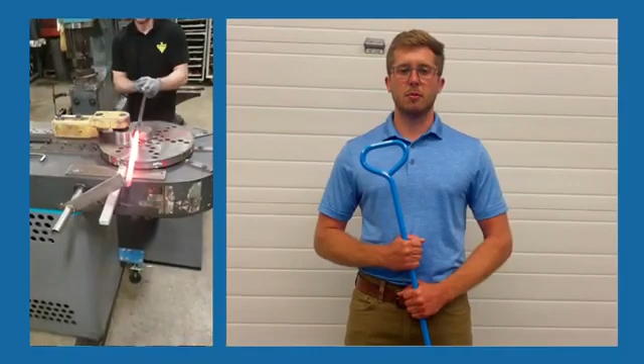Currently, the process consists of heating the steel in a forge until red hot, which requires additional time to make each product, along with producing excess heat, noise, and fumes. This process is performed on 2 different bending machines, with the product being readjusted manually by the operator between each bend. Once the metal is properly heated, the first 55-degree bend is made on a rotary bending machine, which you can see here. The rod is then moved to a secondary bending machine to perform the final 2 bends.

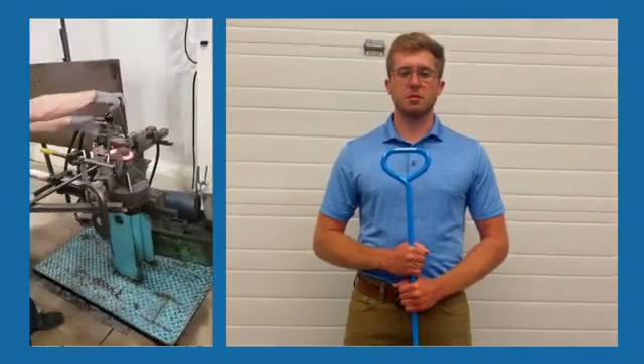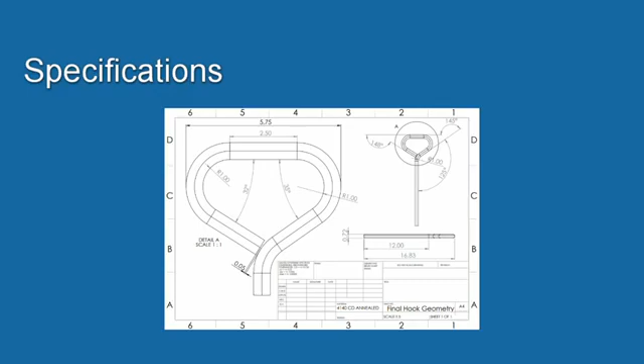After bending the hook, the handle is checked and adjusted using manual correction gauges to ensure the critical dimensions have been achieved. The goal of this project was to design a machine that is capable of bending multiple 1-inch radius bends in a 5/8-inch hexagonal 4140 steel rod to form a hook handle. There were a total of 18 specifications that were listed. However, there were 6 critical specs that determined the course of the entire project.

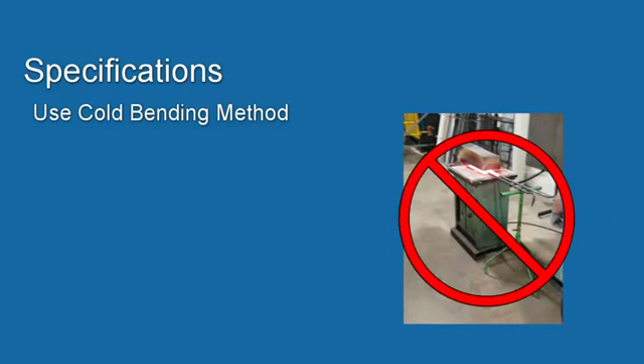First, every bending method in the process must utilize cold bending to eliminate the use of the furnace. Bending cold will cause springback to occur. Therefore, overbending the rod is needed to account for the degree of springback. Second, the process must be completed on 1 machine. This will ideally save the sponsor room on his shop floor and make for a quicker and more reliable bending process.

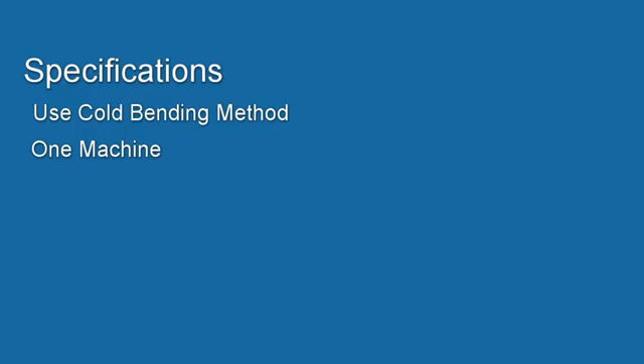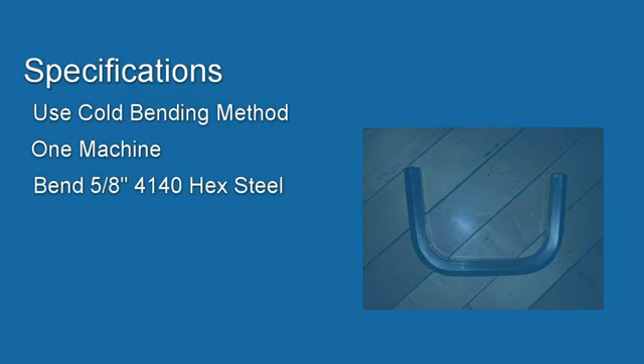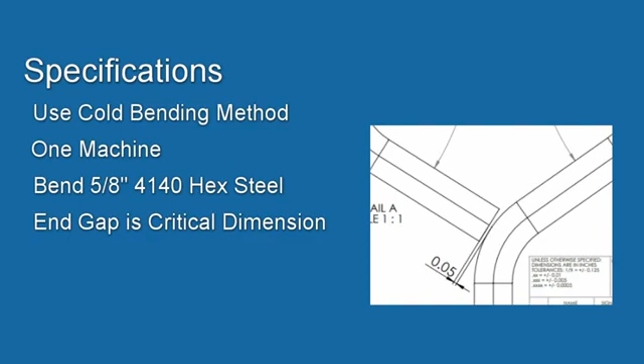Third, as was mentioned earlier, the stock that needs to be bent is 5/8-inch hexagonal 4140 steel. Fourth, the gap at the end of the handle, seen in the attached figure on the bottom right, needs to be minimized to smaller than 0.05 inches. Fifth, the amount of user interaction needed to be reduced. This would result in a more automated process that would require the operator to only load the part and remove it from the machine once the part was completed.

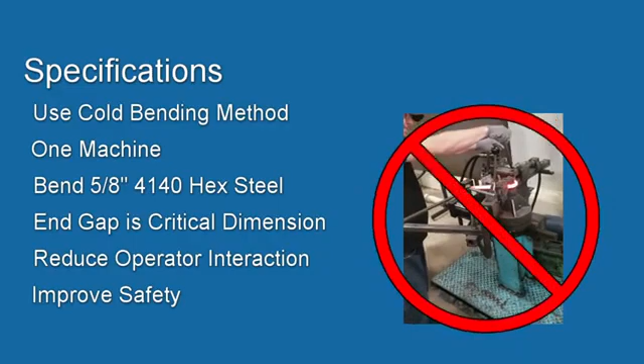And lastly, the safety needed to be improved. So for example, on the current process, the rod swings toward the operator on the final bend, which needs to be eliminated.

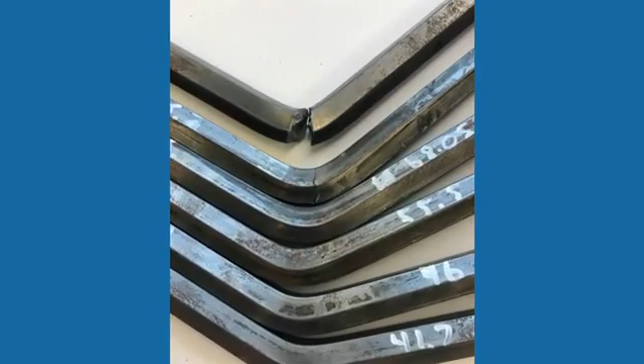During the design of this machine, several challenges arose. The first was the use of cold forming. When metal such as steel is bent cold, there is a chance of rupture due to a high concentration of stress. A method had to be found that would not cause this rupturing. It was found that applying the force at a point caused a high concentration that would lead to fracture. Therefore, the force had to be distributed over an area.

The second challenge was decreasing operator interaction. Optimally, the machine would have little to no user interaction. The part would be loaded, a button would be pressed, and the bends would be completed by the machine. This led to challenges of finding the correct bending order and also bending the part to the required specifications.

The next challenge was adjusting for springback. When cold metal is bent, it tends to spring back closer to its original shape. To accommodate for this, the part has to be overbent. The dies had to be adjustable to accommodate for overbending.

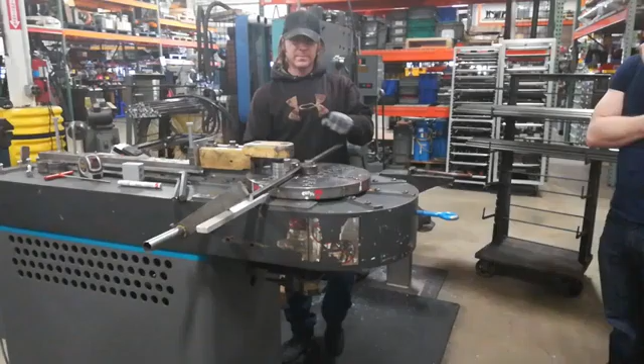To account for the springback involved, an analysis was performed using machines currently available at T&T Tools. In order to collect springback data, raw, cold steel hex stock was bent on each of the machines to determine springback at multiple angles. It was found that samples ruptured at a bend angle of 70 degrees using the Di-Acro rotary power bender. T&T's custom-built bending machine, however, was capable of bending raw material to a higher angle without

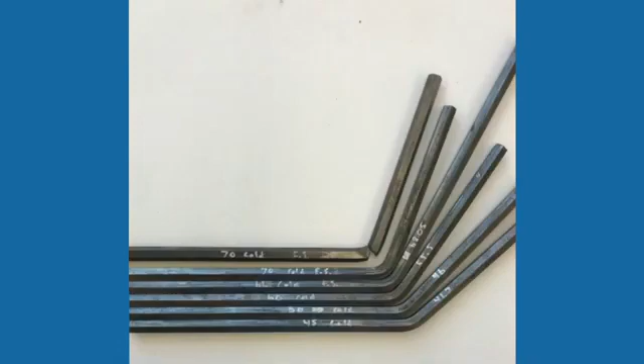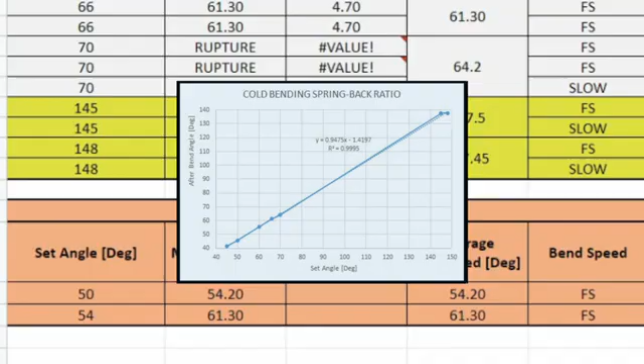rupture. For larger angles, the measured springback was higher than that of lower angles. For a final bend angle of 145 degrees, an overbend angle of nearly 155 degrees was required. For a final bend angle of 55 degrees, an overbend of nearly 60 degrees was required.

3 different design concepts were developed to improve the bending process. The first design concept would bend the hook handle around forming dies using 3 cylinders. The pros of this design are that it requires minimal operator input, improves cycle time, is easy to repair, and is safer because the hook end does not move. Conversely, the required stroke length of the cylinders was very long, and properly positioning each of the cylinders would pose a significant challenge.

The second concept design also requires 3 cylinders. The first bends are made by moving the entire carriage down onto the forming die. The second and third bends are made by actuating the side cylinders one at a time to form the hook handle into its final shape. The pros of this design are that the process is mostly automated, it requires minimal operator input, it is easily assembled, easily maintained. Cons of this design are that the custom dies are expensive to machine, and it also poses a more difficult challenge to program the PLC.

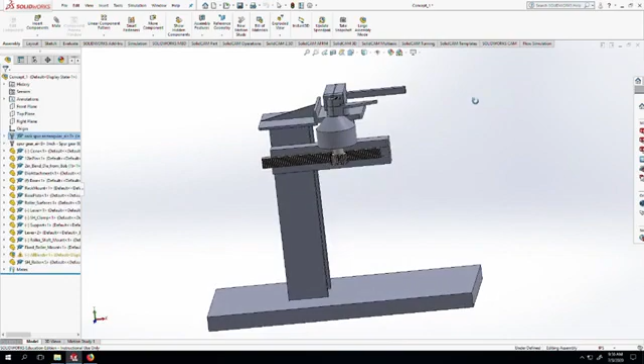The third concept design performs each bend by pulling it around a bending die with a rack and pinion assembly. This concept only bends around one point and is easily adjustable for springback, but requires the operator to reorient the part after each bend. The second concept design was selected for further development.

During the concept selection phase of this project, a national emergency arose as the spread of COVID-19 was declared a pandemic by the World Health Organization. This provided many challenges for the team, as it did all around the world. With the closing of GVSU, the team was required to complete the design virtually while practicing social distancing.

The main concern at this time was the concept selection, since the concept that had presented itself as the best in meeting the specifications used an untested method for bending. With the support of T&T Tools, the team was able to get the required testing performed, and a concept could be chosen. From there, the team went through complete design of the concept without meeting in person.

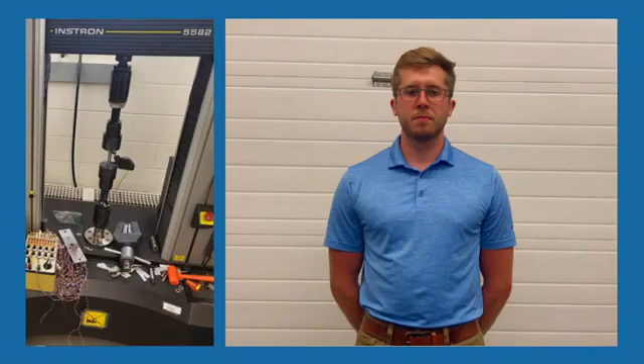The prototype was first modeled on SOLIDWORKS with key dimensions that would be used within the actual design. The ANSYS simulation used the imported SOLIDWORKS geometry and was set up to solve large deformations with multilinear isotropic hardening properties. The supplier of the rod material conducted a tensile test for the 4140 hexagonal steel rod. The nonlinear region of the stress-strain results was entered into the simulation to account for the nonlinear yielding properties.

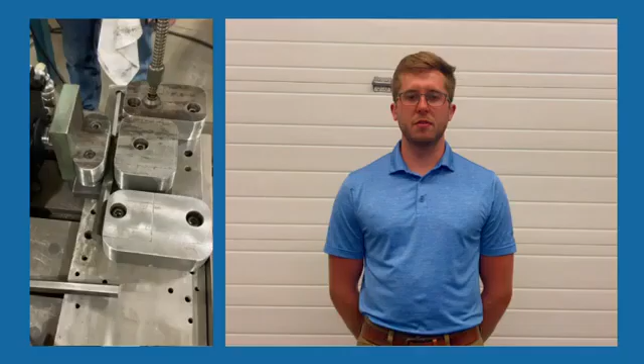The SOLIDWORKS model was sent to T&T Tools to be manufactured and eventually tested. 3 trial runs were conducted to ensure that the prototype would function the same each time. The prototyping concluded that rupturing would not occur in the material.

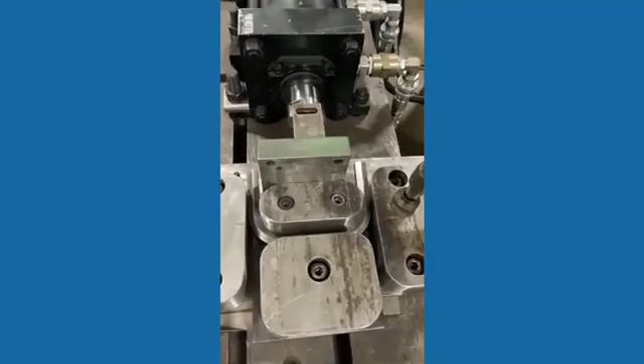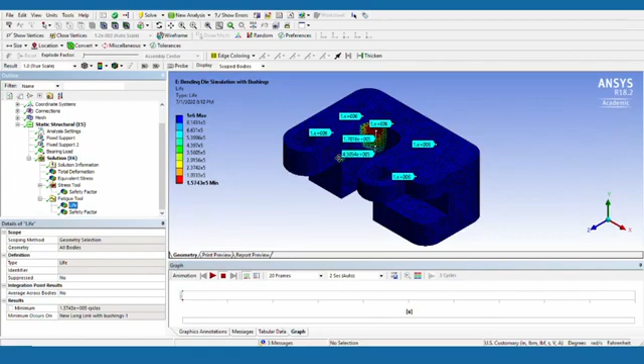When looking at the fatigue tool, the only point that can be seen below infinite cycles is where the maximum stress was experienced. The consistent load that this die would be under would be much less than 10,000 pounds, which would yield infinite cycles at this position.

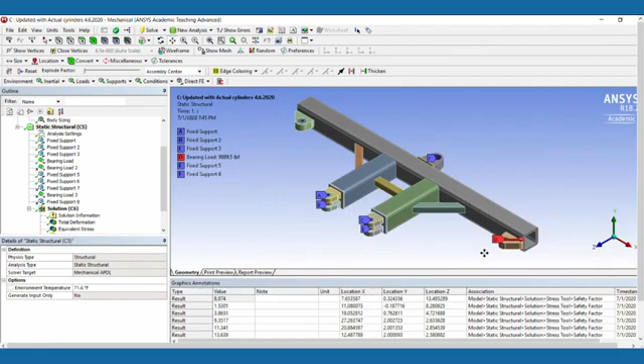Taking a look at the equivalent stress on the frame, from the probes, it can be seen that the majority of these stresses are below the 46,000 psi yield stress of ASTM A500 steel square tubing grade B, which is what this carriage is made from. These 2 high areas of stress, as you can see probed, is where the maximum occurs, but these are due to stress risers, which is from importing the assembly into ANSYS, and it can be seen that these mates are causing these high stress risers.

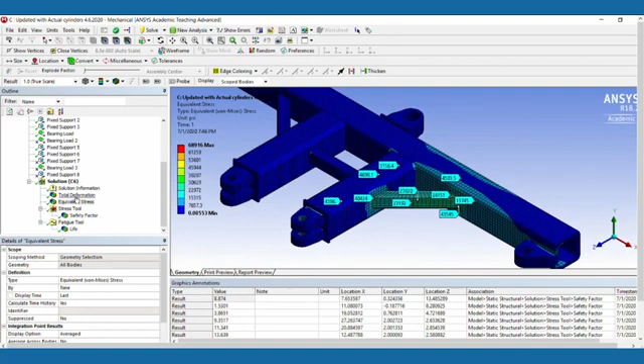Taking a look at the total deformation probes, it can be seen that even at the maximum value and the maximum position, none of these are values they need to be worried about. High factor of safety was seen throughout the entire portion of the carriage when this load was applied. Now, taking a look at the fatigue tool, it can be seen that infinite life is experienced at this position.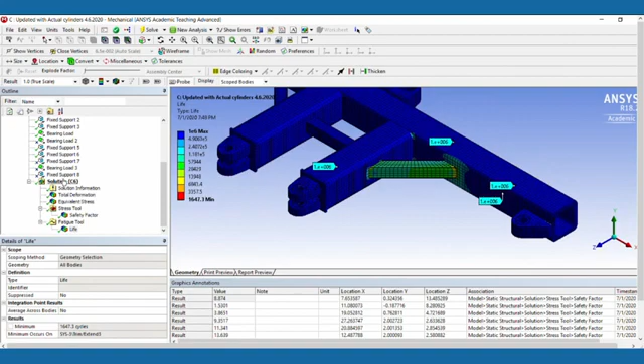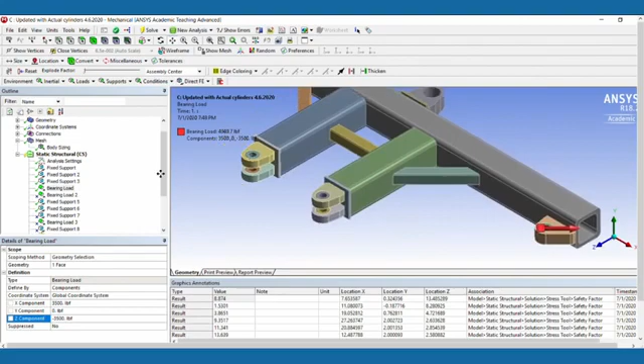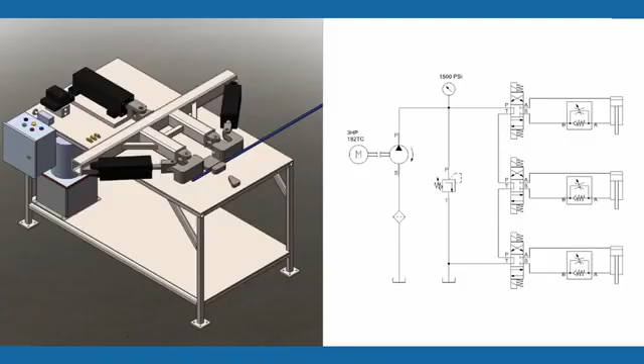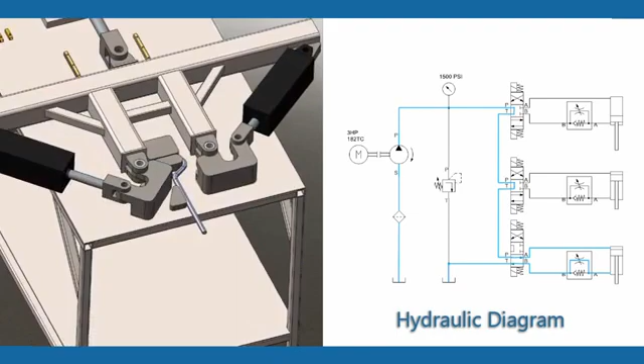Once the force required to make each bend was found and verified, a hydraulic system was designed in order to supply said force. Since pneumatic systems are generally for lower force applications, a hydraulic system was implemented. This system was designed for 3 gallons per minute at 1500 psi with 3 cylinders in a parallel circuit. In order to achieve control over extension and retraction of each cylinder, tandem center directional control valves were used. These valves are controlled by PLC via 2 solenoids each.

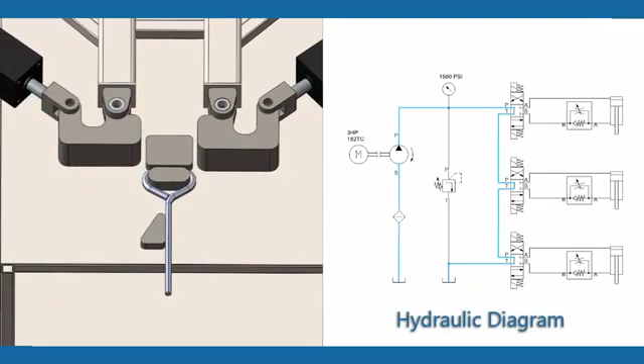When no solenoids are activated, the spools are centered, allowing flow through each back to the reservoir. However, when a solenoid is activated on the valve, forward or reverse flow into the corresponding cylinder will be initiated. It is important to note that this system only allows for 1 solenoid to be active at a time. However, the system does allow for different lengths of extension simultaneously.

Once the requirements of the hydraulic system were known, the electrical system was developed to meet them. The electrical system was designed around an Allen Bradley Micro 820 PLC. The PLC is powered by a 24-volt DC supply. It takes push-button input for operation and uses Hall effect sensors at the cylinder rods for the sense input of rod extension and retraction positions. The PLC also controls directional control valve solenoids, which helps allow for minimal operator interaction in the bending process.

A 3 horsepower AC motor is used to power the hydraulic system. This motor is turned on and off by the PLC via the motor contactor and can be manually shut down by a Category 0 e-stop in case of emergency. Finally, in order to facilitate increased longevity in the motor's life, a circuit breaker and overload protection were designed in line with the motor.

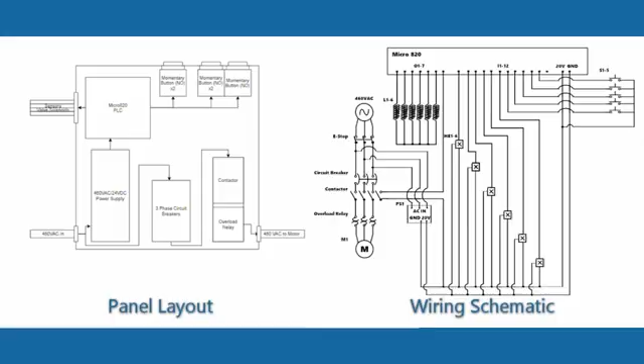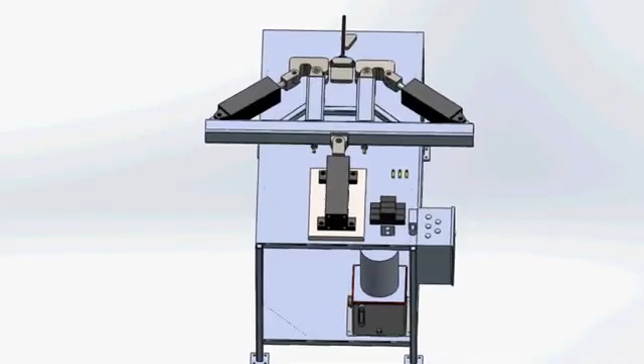This new design and process for the bending of hook handles is a significant improvement over the current process. The new process removes the need for heating the metal and requires only one machine without requiring the operator to reorient the part between bends. As a result, it provides a safer, more environmentally friendly, and most importantly, more efficient alternative to the current process.